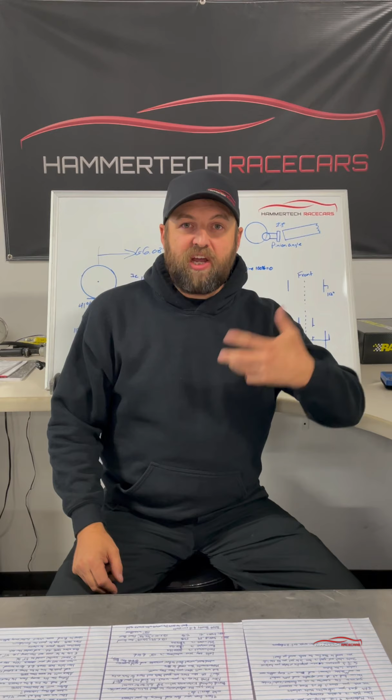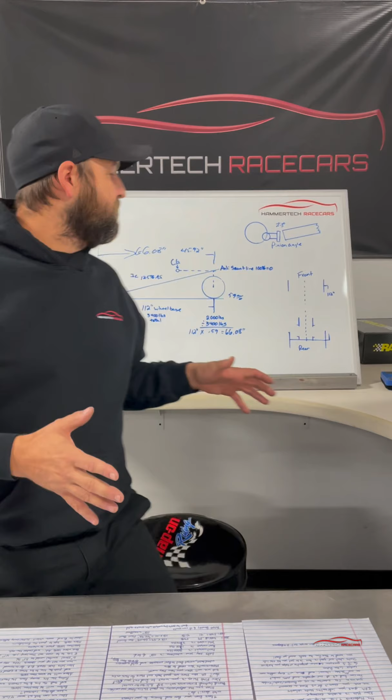And then that tells you the exact, I'm talking to the 100th of an inch, height that your CG is going to be. So there's lots of calculators out there online that can help you do this, programs that you can download. But let's show some of the math that goes into these things. So once you know your wheelbase, what it weighs on the front, what it weighs on the back.

So let's say our wheelbase is 112 inches, which is kind of common. This is just a generic car. It's not any kind of customer car. I'm just making these numbers up as we go. So let's say on the front, we weigh 2,000 pounds. On the back, we weigh 1,400 pounds. So how do we figure out this distance of CG?

Well, we take our total weight of the front divided by the total weight complete, and we get 0.59. That's 59% front bias. And you can double check that by doing the measurement on the back. 1,400 pounds divided by 3,400 is 0.41. 41% plus 59% is 100%. So you're 100% of the weight. We've got that figured out. Now you take your wheelbase times 0.59 and you end up with 66.08 inches.

Now, this is where guys get confused because they think, well, everything's on the front, I just measure back 66.08 inches. That's where my CG is, right? Wrong. This dimension is actually from the center line of the axle forward. So from the center of the axle forward, 66.08 inches is where your CG is.

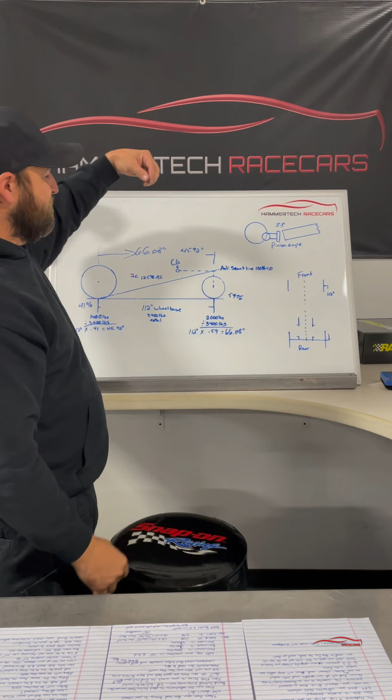You can double check that again by doing the back. 112 times 0.41 is 45.92. Measure it from the front back. These two added together equal our 112. So the math is adding up, we're on the right track. So now we know where the CG is front to back. And if you were to put a cable where that dimension is and pick your car or truck up, it would be perfectly balanced front to back.

Now, we're not saying go get your buddy's forklift and try to pick your race car up. That's what this video is trying to keep you from doing.

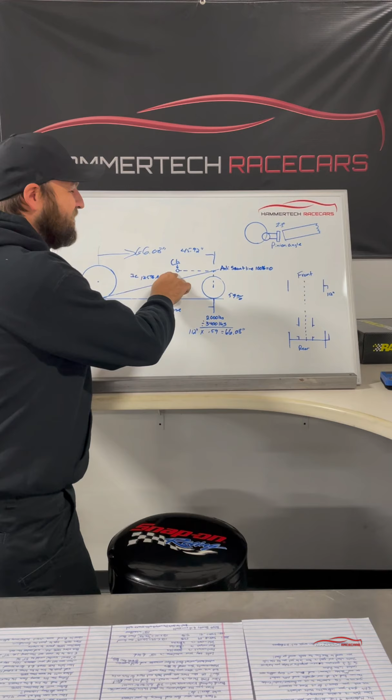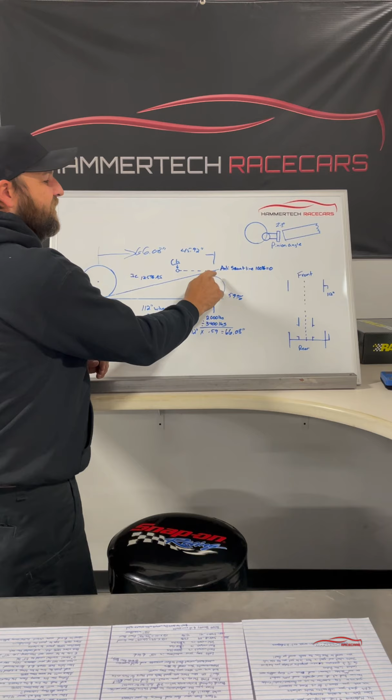So once we know the CG, we're going to draw an imaginary line straight forward, level to the ground, and then we're going to come straight up from the front spindle, and where those meet is a point. Now we're going to take that point back to the contact patch under the axle and draw that line. That line is your anti-squat line. It's very beneficial to know exactly where this line is so that 100% anti-squat is your neutral.

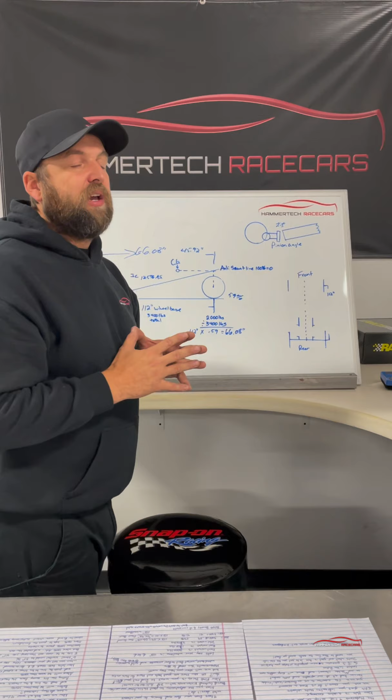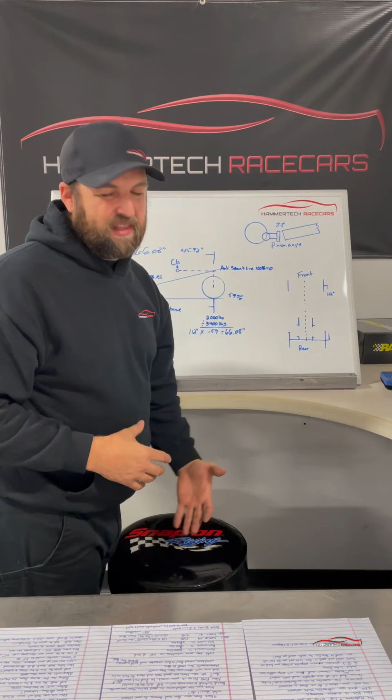So in a perfect world, if you put your 4-link bars right on the anti-squat line at 100, it would have no wasted movement. You wouldn't be compressing the shocks, you wouldn't be extending the shocks, it would just be all forward momentum. Now, we don't live in a perfect world, so we're always trying to add traction. You guys make big power, so we've got to have a way to plant that tire down. So 100% anti-squat is neutral.

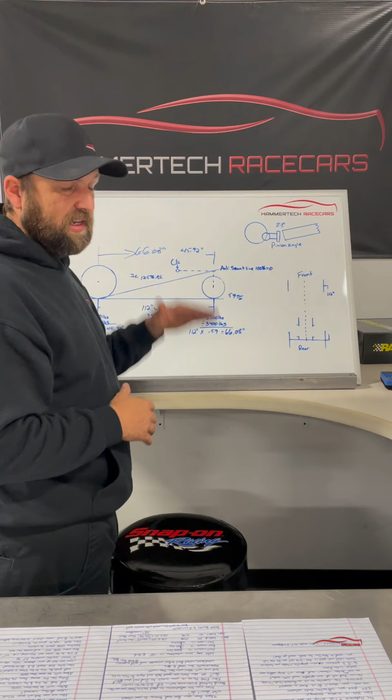Now below the anti-squat line is going to be less than 100%, and it's going to actually suck that tire up into the chassis. So you're going to compress your rear shocks when you leave. Now, there are situations where you have to be under that.

If your customer has 4-link brackets bolted on or welded on that you can't get above that line, you got to figure out a way to do it. So we can do it with shock settings and springs and things like that. We can make it work, but ideally you want to be above that line.

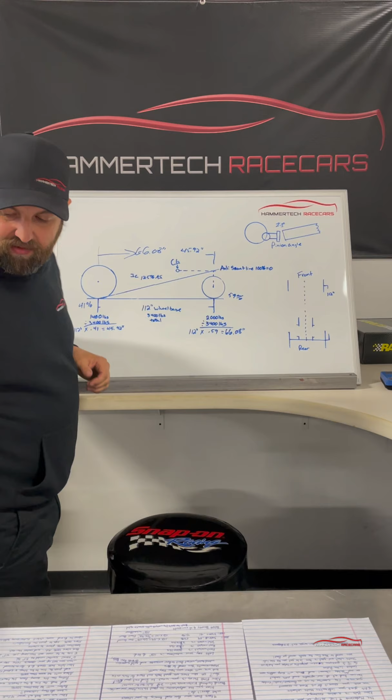So when you start getting above the line, now I'll draw this out to where you guys can understand. So this is your 4-link bar to your chassis mount, and there's your bottom bar coming out. So if you draw these imaginary lines out to where they intersect, we're above the anti-squat line. So let's say it's 125% anti-squat.

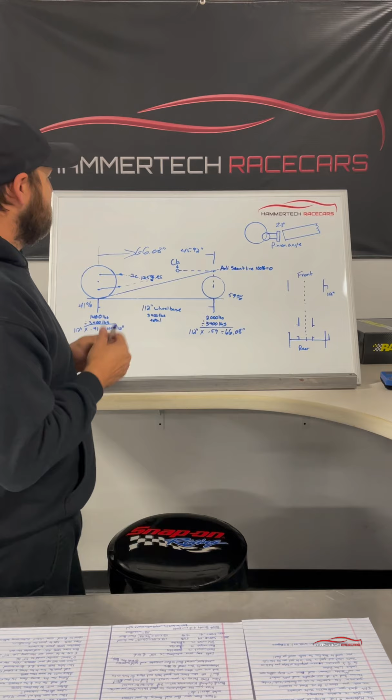What's that gonna do? So when we leave, the tire is actually going to be pushed down to the ground. The chassis is going to come up, so you're going to have extension on your rear shock. So you're adding force down. Now if it's below, you're going to take that away. So you're going to get a bunch of wheel speed, you'll be prone to doing wheelies. Wheelies are cool, everybody likes to see them, but it's not going to make you go fast.

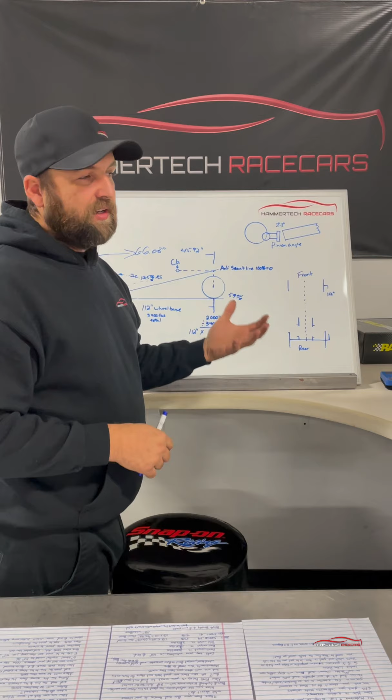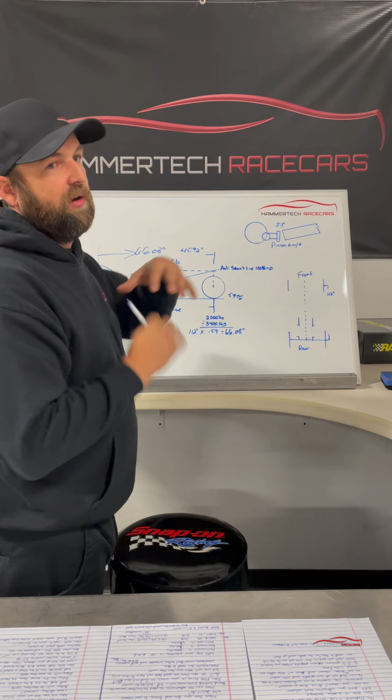So we want to try to stay above it at all costs. Now you can get too far to where you're actually smashing that tire and it's cupping up and driving over itself, and you're not going to be going any quicker to the 60 foot. So there's a fine line of height of that instant center. Now the further forward you go, the less violent it's going to be. The closer you get it to the rear end, the more violent that separation is going to happen. So like the radial guys, they like to have a bunch of separation and just try to shove that tire through the concrete and get all the traction they can.

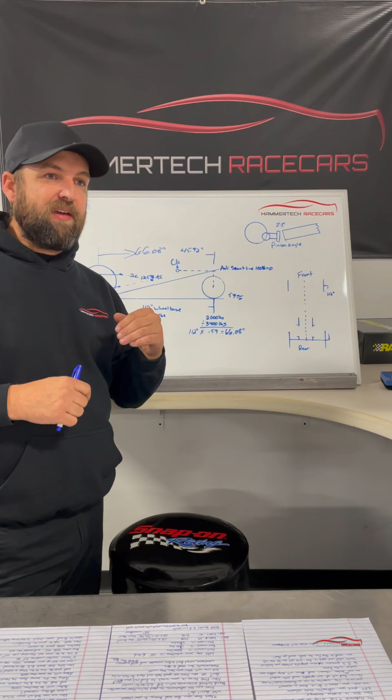So the shock placement on your car can help with this. So say you have a 6-inch shock, 50% would be 3 inches of compression, 3 inches of rebound, and we're just going to set it up at neutral. Now if I know for a fact that we're going to be able to get above 100% anti-squat, what I'll do is I'll actually give it more extension than compression. So on our same 6-inch shock, I'll set it to where we have 2 inches of compression and 4 inches of rebound.

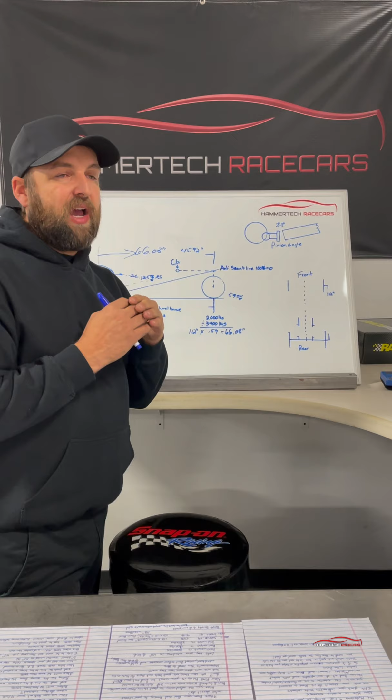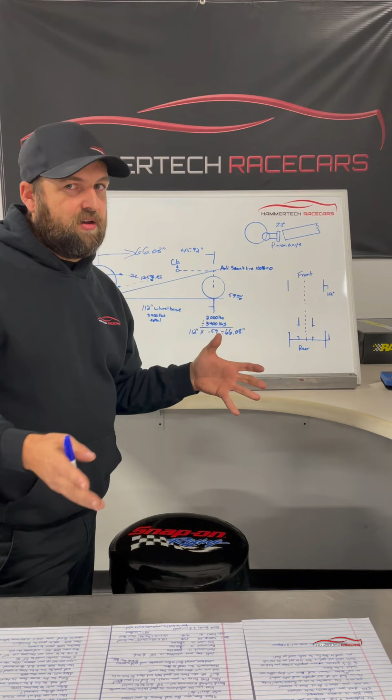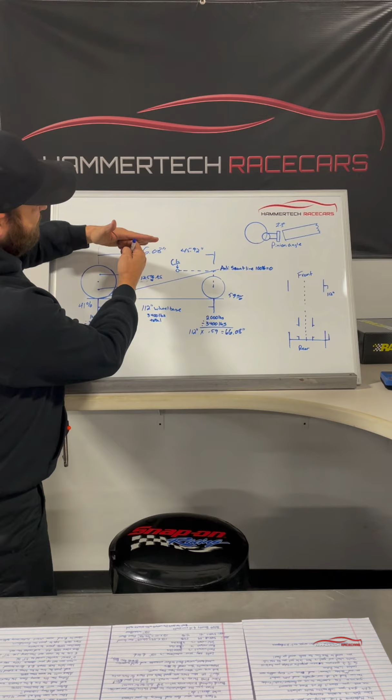So I can control the rebound, basically how hard that tire is going to stay hooked up going down the track, along with your rebound settings and shocks and springs, and all the stuff plays into it. But that's the general idea of all this stuff, is to shove that tire down. So once we're above here, what it's actually going to try to do is the body and the chassis is going to pivot this way, which will actually help shove your front tire down. So you're going to be less prone to wheelieing, you're going to add more bite on the rear. So that's just part of the 4-link system.

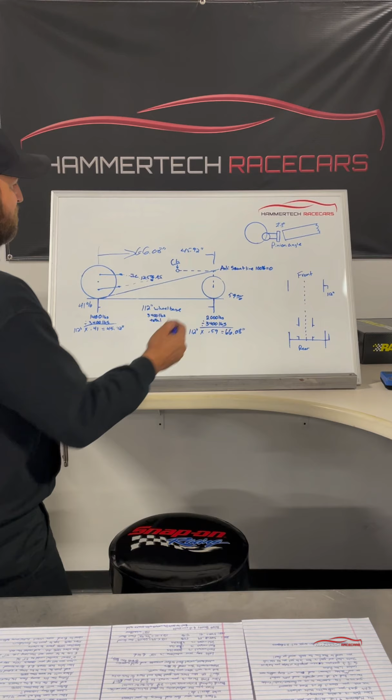We know where our CG is, we know where our instant center is going to land. We have a ton of adjustments we can make to add traction, to take away traction. What do we do if we do all these things and the car leaves but it drives left or right? Now what do we do?

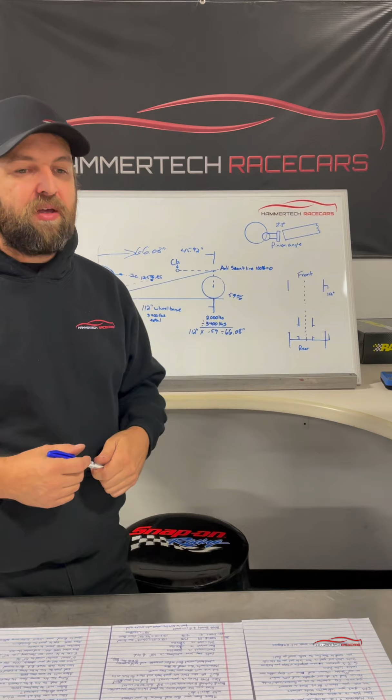So the first thing that I try to do is I'll actually do preload. Preload is the upper bar on the passenger side is where I adjust preload. And all preload's doing is it's taking that axle and it's twisting it up and down just like that. So if it's driving to the left, we know, and especially if it's sitting on the scales and you start adjusting preload, you can see it move 50, 60 pounds, quite a lot of weight in a hurry from left to right.

So we'll go back to, we leave and the thing's driving left. So what do we do? We start adding preload. So we'll go 2 to 3 flats. Now your tube adapters, normally everybody's got the tube adapters with the 6 flats on it, and that's what we call a flat. So when you change a flat, that's what we're talking about.

Now I don't like to go more than, say, 3 flats, which is half of a rotation on the preload adjustment, because you're just going to start getting things in a bind. So we have our car, we're at the track, things driving left a little bit, we do our preload, it helped it, but it's still going just a little bit.

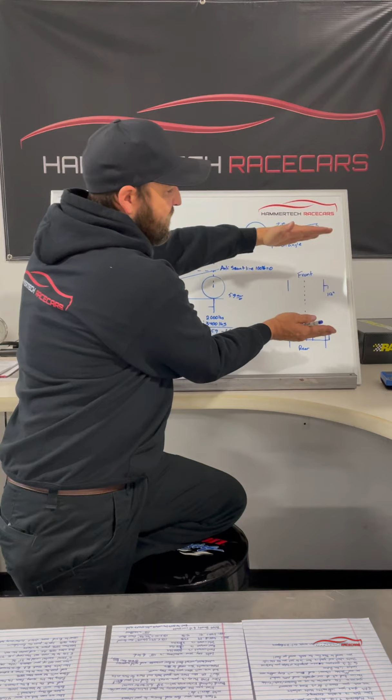Now what do we do? So the next step I will do is add rear steer. So rear steer is, you think of it as your front tires versus your back tires. When we started, everything was square. Now what we're going to do is we're actually going to cock this rear end shorter or longer to get the car to go straight.

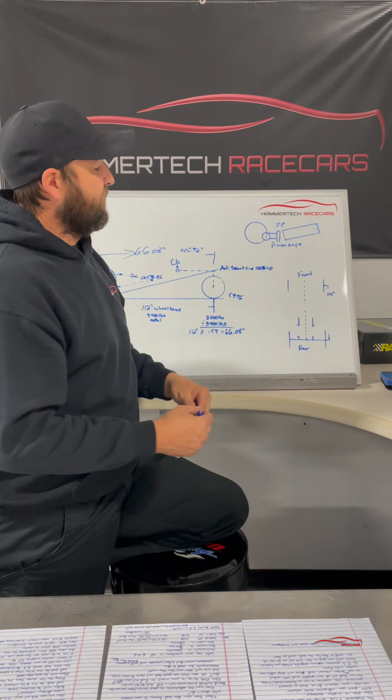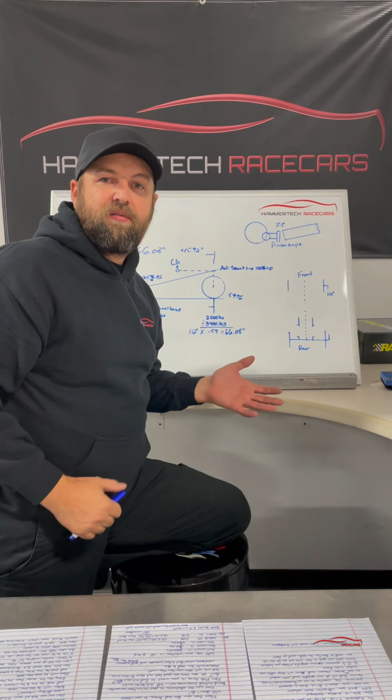So if the car's driving left, what we're going to do is we're going to take this rear end and we're going to shorten the passenger side, which will drive it back to the right, like a forklift. You know, when you're driving a forklift, the rear tires are normally your steer tires, so it actually turns opposite of which way you're trying to go. So if it's going left, we're going to shorten the right side. If it's going right, we're going to lengthen the right side.

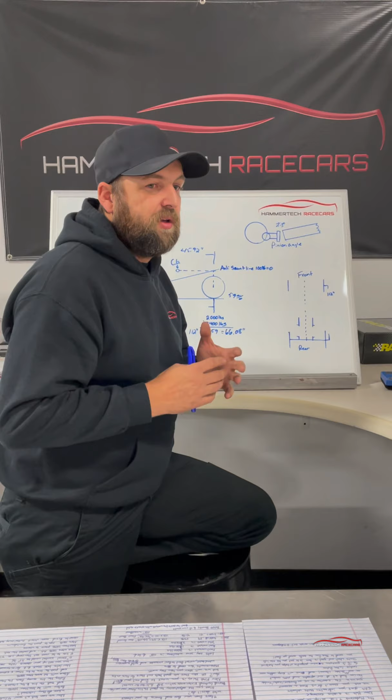I like to do all my adjustments on the passenger side. That's just the way I do it. Some guys will do it on the left. You can get the same results, but most guys do it from the passenger side.

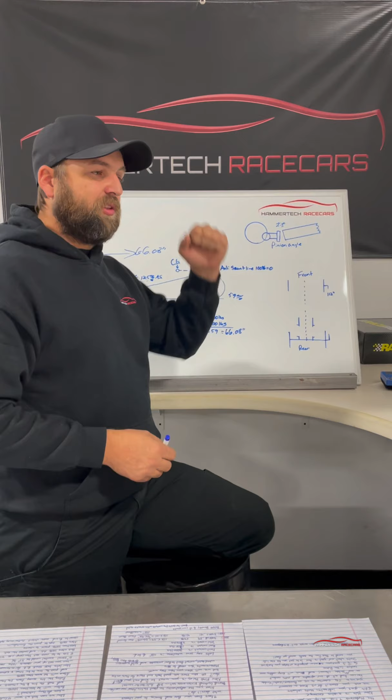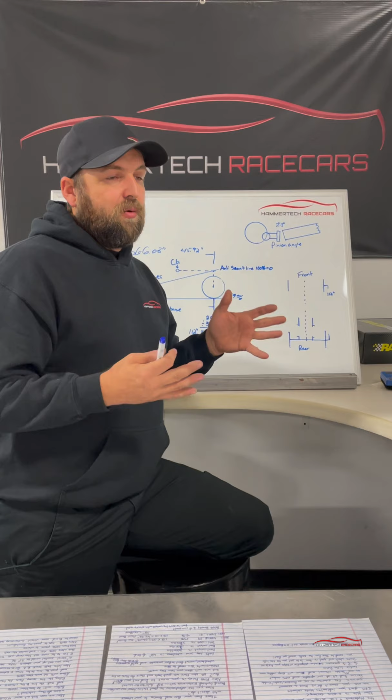We'll adjust preload with the upper bar. And once that's not enough, we'll change our rear steer. Now, once you change rear steer, you need to readjust the rear end being centered in the car, because if you got a wishbone or drag link, whatever it is, when you adjust that, it's going to shove it over one side versus the other. So once you get your rear steer, you got to recenter it up.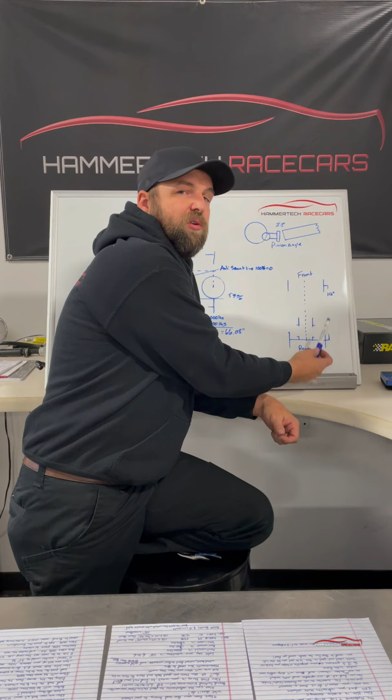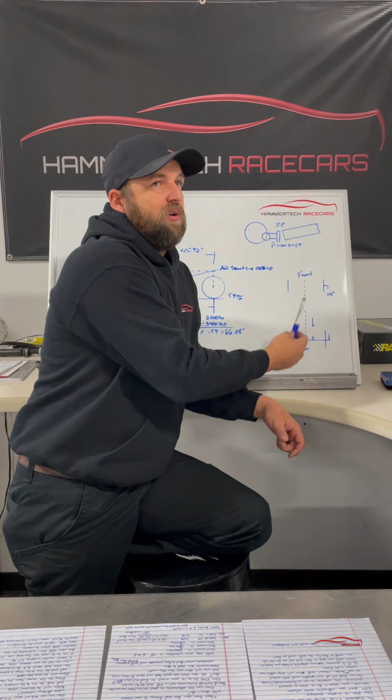Now, when we measure rear steer, we'll measure from the wheel hub center line. So if you measured your wheelbase, it was 112, we're going to go an 1/8 inch to 3/16. So say we're 111 7/8 on this side wheelbase. That's our 1/8 inch of rear steer.

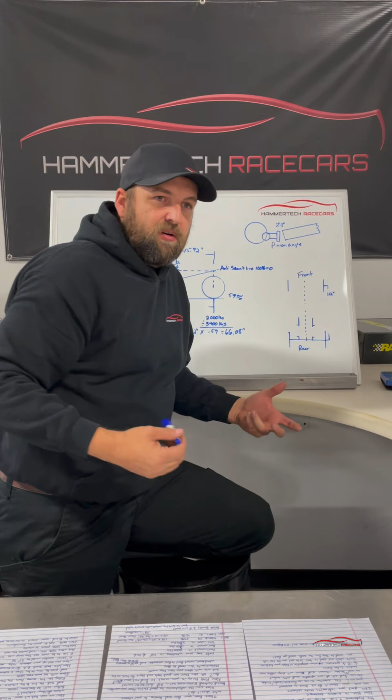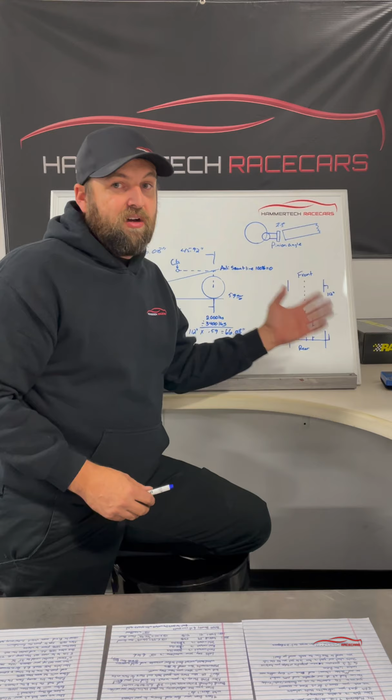Some guys will measure it on the 4-link bars. There's nothing wrong with that. You just got to be careful of going too much. We don't try to go anything more than a 1/2 inch of rear steer at the hub. So our shortest dimension that we're going to get out here is 111.5.

Now, an 1/8 inch of rear steer, you're going to notice it doesn't take a lot to start bringing that car back. So we go back to the track, we got our 1/8 inch of rear steer. It's still driving left just a little bit. Now what do we do? So now I go back to our preload settings again, and I keep adjusting the preload.

So once I get to my 3 flats and 1/8 inch of rear steer in the car, if it's still driving left, then I'll go back to neutral on preload. I'll add another 1/8 inch, and then we'll be at 1/4, and I'll just keep tweaking on it like that, making passes until the thing goes straight.

You don't want to go cranking your preload 1 turn, 2 turns, you see this a lot where these guys are just using one of these adjustments to try to fix a problem that could be easily just a little change on a couple things. So once you get past that point, it's going to start binding on stuff, and you're not going to get the suspension movement that you want that's nice and free and fast.

So like I said, rear steer, add preload. If that's not enough, add more rear steer, then add preload, and just keep going until you get the thing going back straight. So keep in mind, every time you move that rear steer, you got to keep centering up your axle.

I hope this helps. This mysterious 4-link thing, there's no black magic in it. It's all just math and knowing what to adjust, when to adjust it. So if you need help with it, give us a call. We love helping you guys. That's what we're all about here.